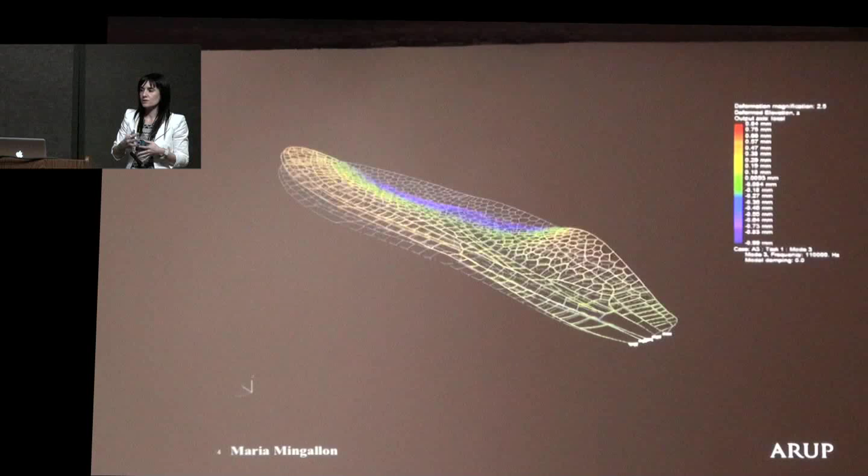So again, geometry, form and geometry in that sense and the structure are not separated, and they're all forming part of the same thing together with function. Now, the use of parametric design tools is actually essential to analyze something like this. It's mainly because parametric design, like nature, is not looking at the parameters themselves individually, it's looking at the integration of those parameters and how they interact with each other. That converts the model into a dynamic entity, so that it's possible to integrate different design decisions throughout the design process.

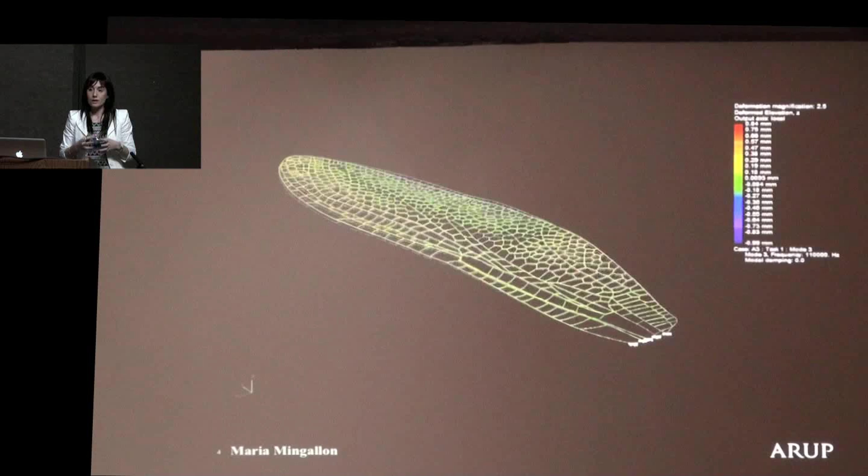Now, all of this sounds very good, but how do we actually deliver total architecture in real projects? Well, tonight I'm going to talk to you about 4 projects in total, where advanced computation has been key.

And the first one is the Metropol Parasol. This is an ARUP project by architect Jürgen Mayer-Hermann. It's located in Sevilla, in Spain, and the ARUP engineer was Jan-Peter Koppitz.

As you can see here, it's a very complex structure made out of wood. But it was essential that parametric design and digital fabrication were used to deliver this project. It would not have been possible at all to deliver something like this within the budget and time frame allowed. Just so you get an idea, it actually took less than a year to erect this on site.

Now, this is the actual bit that made that possible—this is the parametric model behind the scenes. The boxes in black are the inputs, the ones in blue are the calculations, and the ones in orange are the iterations.

What happens here is that we start with a certain plate thickness, as low as possible, and a number of bars for the joint type. The more bars, obviously, the more capacity you have in the joints. But you want to start with the lowest you can, and work your way through a loop: you enter the loop, do your check for structural capacity, considering both the plate thickness and the joint type—the number of bars. Then if it's not okay, you upgrade either the thickness or the joint type. There has to be a conversation between those two parameters for which one you upgrade first and which one you do later.

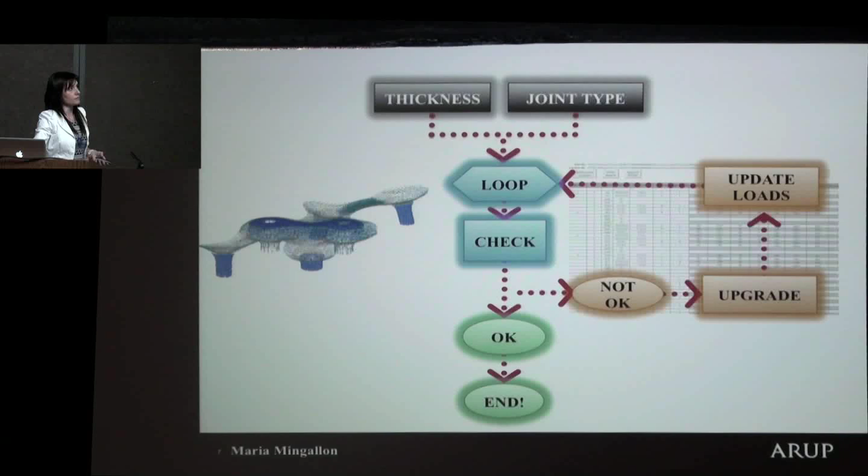The other thing I forgot to mention, which is good about this system, is that you can actually change the catalog of thicknesses and joint types at any time in the process, which is a great advantage to have.

This is the structural analysis done in GSA. At ARUP, we actually have our own software that we developed internally. So for some things we do depend on big corporations, but especially for structural analysis, we don't—we code it ourselves. We also sell it, and this means we can personalize and customize our tools. We ask for the developments we want in this software, and we get it done.

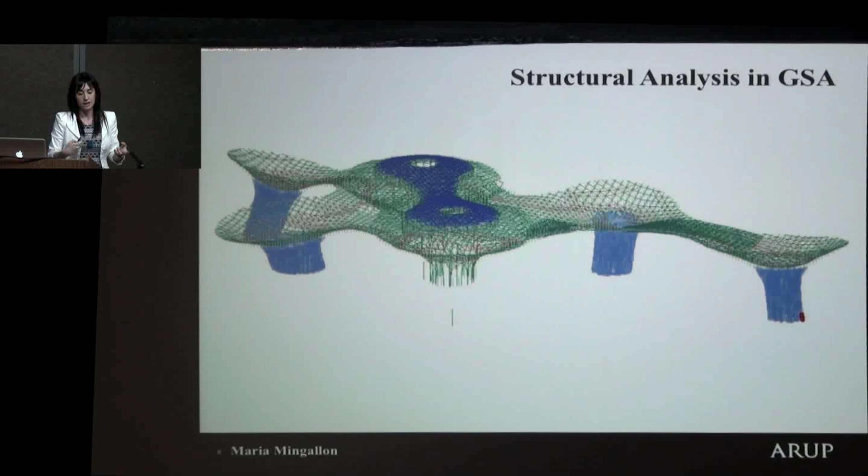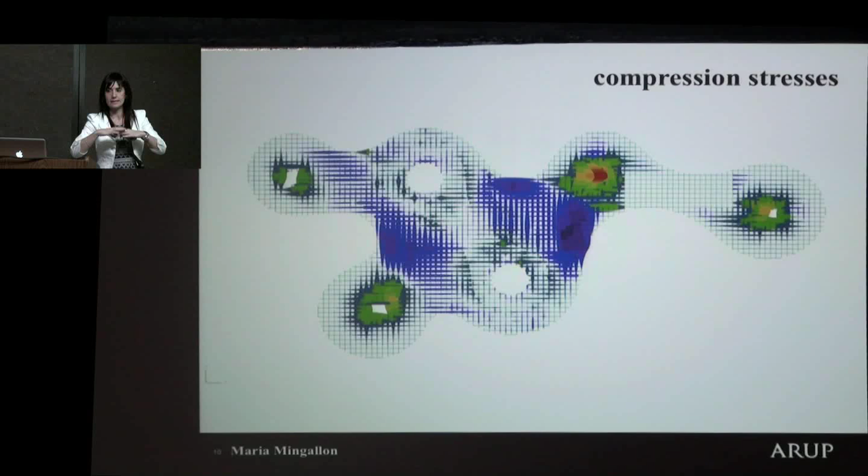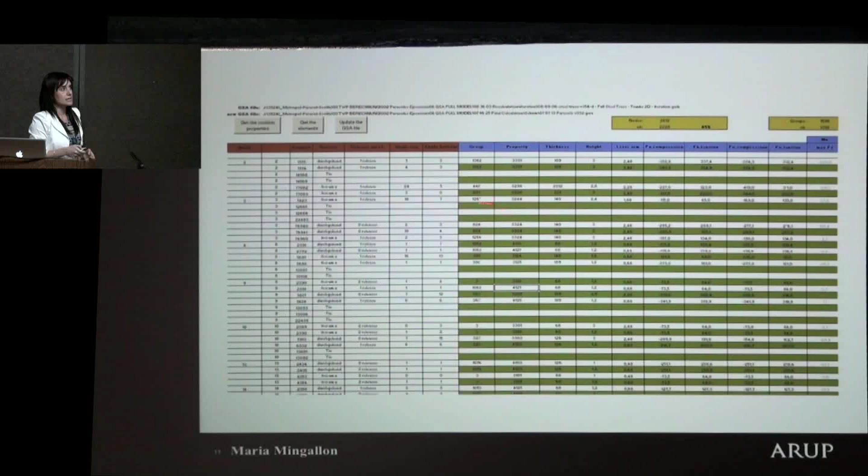Now, after all the different iterations, this is the result. There are no drawings that are easy for construction. All the fabricator wants to actually build this thing is this—as crude as it can sound, it's just a spreadsheet from which they are going to fabricate all these different sections and different joints.

And only with that data, this KUKA robot can actually start. This is a 5-axis robot which was running for 360 days to cut the pieces for Metropol Parasol.

And the plates arrive on site together with the steel joints, all these little boxes. Erection starts on site. You can see the dimension and the scale of the parasol. That's a person right there, and this is one of the start of the columns.

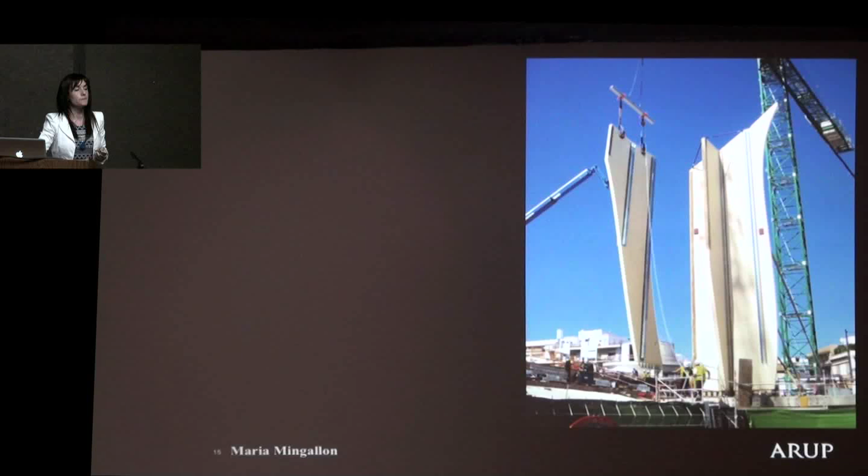They built this temporary scaffolding or platform on top because it was just easier to get your workers up once in the day and start putting all the pieces together, as opposed to having to go up and down with cherry pickers or scissor lifts or other construction devices. It's one of the things that really comes into play when you do complex structures: this sequencing, the phasing, and how you're planning all of that.

So even though you're going to be architects, and maybe some of you actually go into the contractor's side, if you end up doing design, you still have to think about how your thing is getting built. You still have to think: is this necessary? Would that be good? Would that be feasible? Would that make it very expensive? All that sort of thinking has to go in there as well.

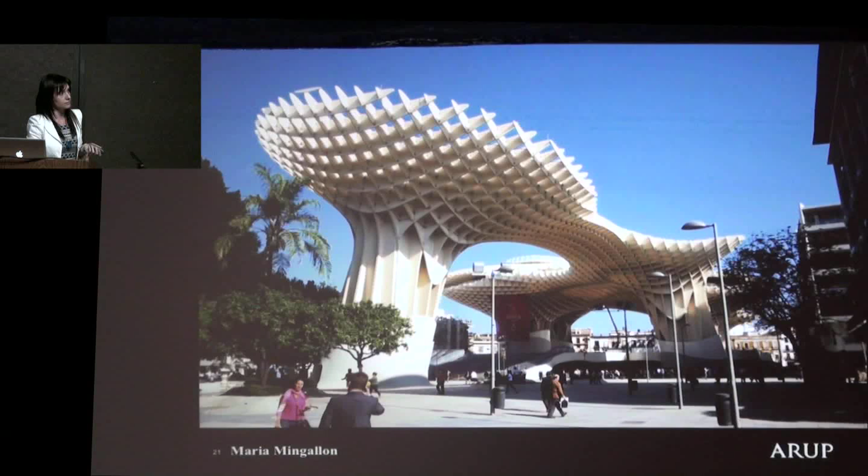And this is it. The Metropol Parasol became real. So there are some images from the top. It actually had a footbridge, mainly so that people could come in here and look at the amazing views of Sevilla.

Thanks to the use of advanced computation, we were capable of adding a lot of value to this project. We did three things mainly: first, minimizing the steel tonnage and wood tonnage used for this project; reducing the number of bars that would have to be used on the joints; and most importantly, talking the language of the fabricator, because all we did was transmit that spreadsheet I've shown, and that fed the entire fabrication process. There were no drawings used for construction or anything along those lines. It was only that spreadsheet I've shown.

And that spreadsheet was actually just the output of all this automated design process. There was nothing else that you actually had to produce.

The Wawona sculpture is a piece by artist John Grade, based in Seattle, who came to us with a commission he had won to make a sculpture out of the Wawona ship. Now, what happened is that the ship was in a very bad state, deteriorated, and they couldn't really keep it as such.

So they decided that with the material that made the ship, with all those timber pieces, they could actually make something out of it and exhibit it, making people aware of how historically important the ship actually was.

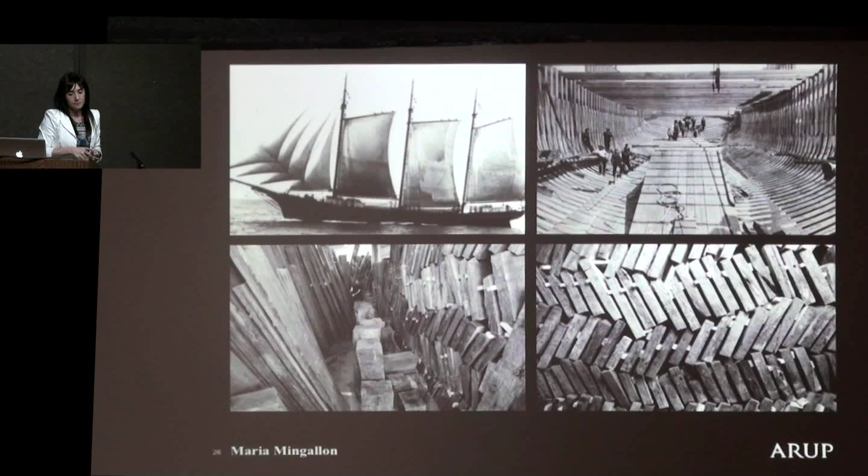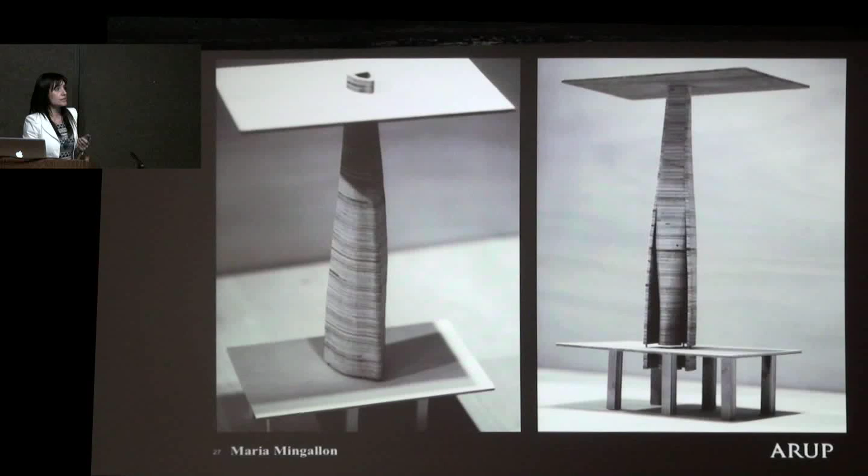Now, if you have realized, I have just said that we are going to make this out of 2D planar elements. So in essence, he was asking us to do this out of this. And so we started to figure out how we were going to actually deliver that.

So what we did was actually divide the structure into different pieces and figure out that we needed a steel frame that could accommodate the different tapering that had to happen in the structure.

What happened as well is that these panels here, we CNC'd them, but we had to think about how much we would actually CNC or mill them by, so that they could accommodate the tapering both horizontally and vertically. So the dimension of these panels, both vertically and horizontally, was set by how much we could actually mill these panels by. And then they were set on the steel frame, which was also taking care of the tapering so that they look as flush as possible.

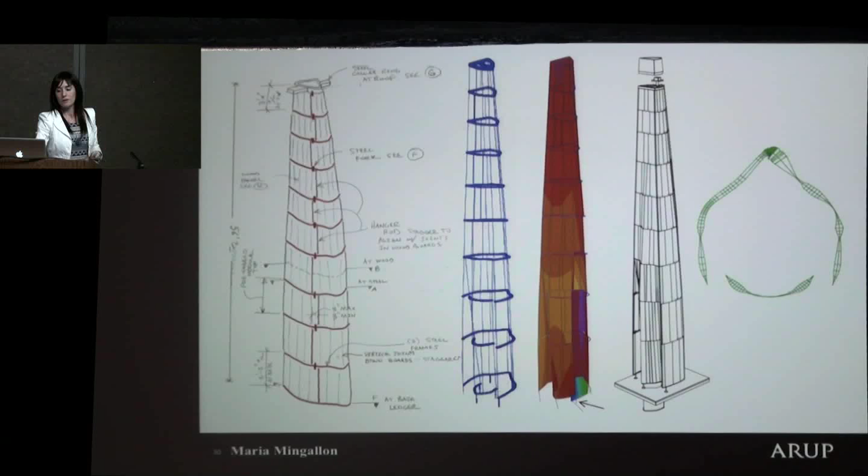And they actually ended up looking very flush. So that's a snapshot of the Rhino model that was used to design this structure, and that's the steel element that I was just talking about.

So this was repeated along the length of the sculpture, and it was taking care of the slight taper happening from one module to the next. Basically you're trying to make something out of pieces that are completely outside your geometry, but doing that by creating a little puzzle.

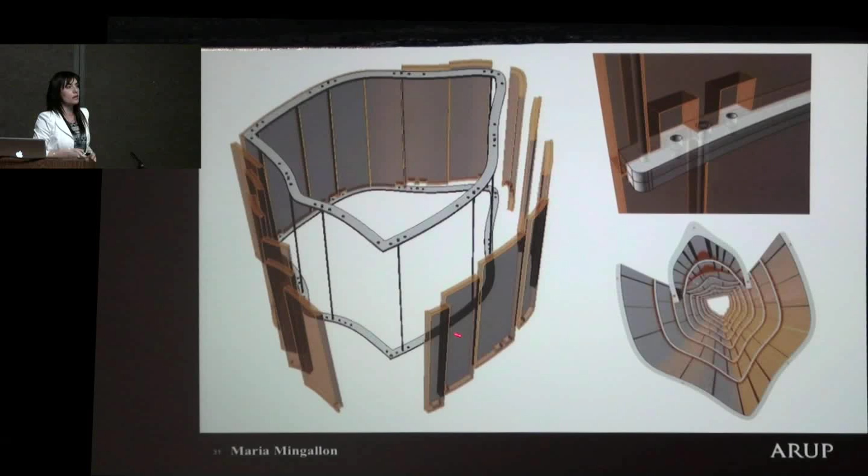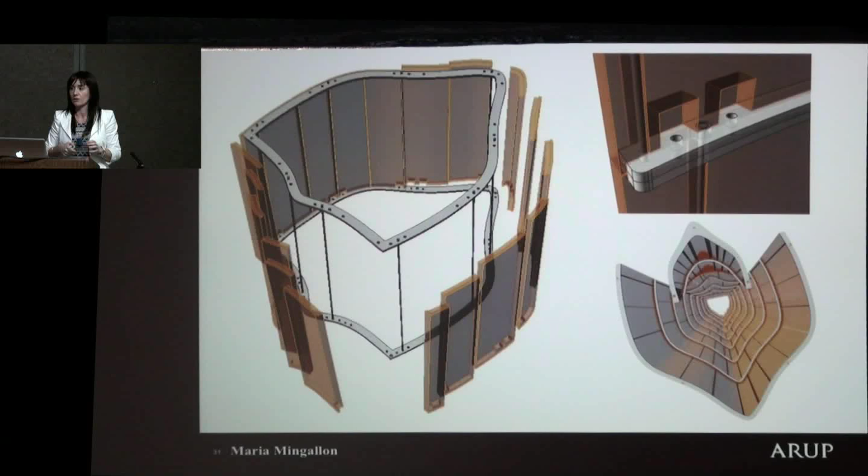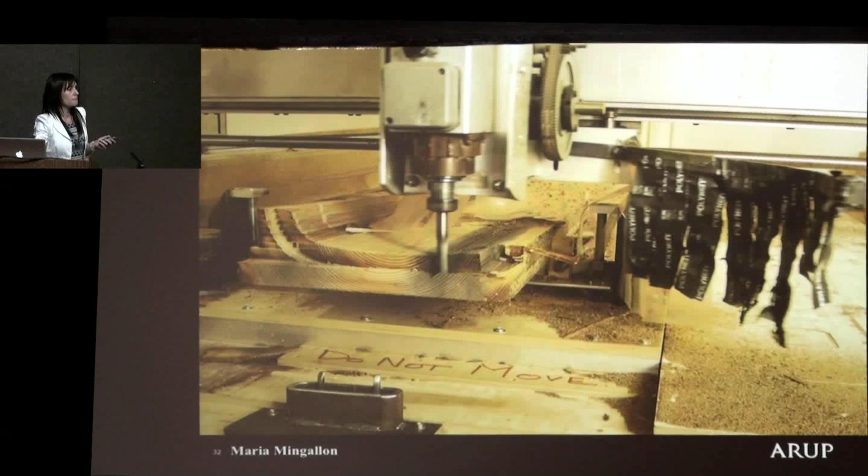Now all of this was modeled in Grasshopper parametrically, and the actual CNC G-code was obtained directly from the Grasshopper model. So these are some pictures of the CNC milling while it was taking place, and this is the piece finished.

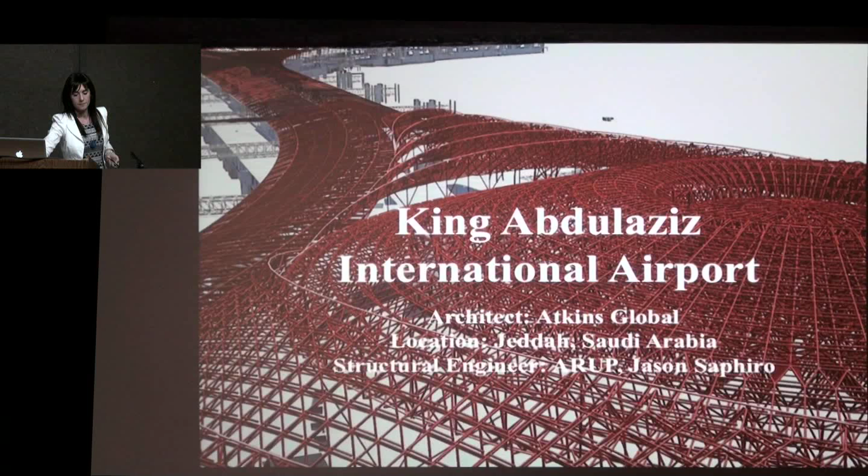So the airport roof is actually made out of, we can say, 3 arms, and they have a central roof which is called the lens. And when you take a section through one of those arms, this is what you get - what we call the gills and the lens.

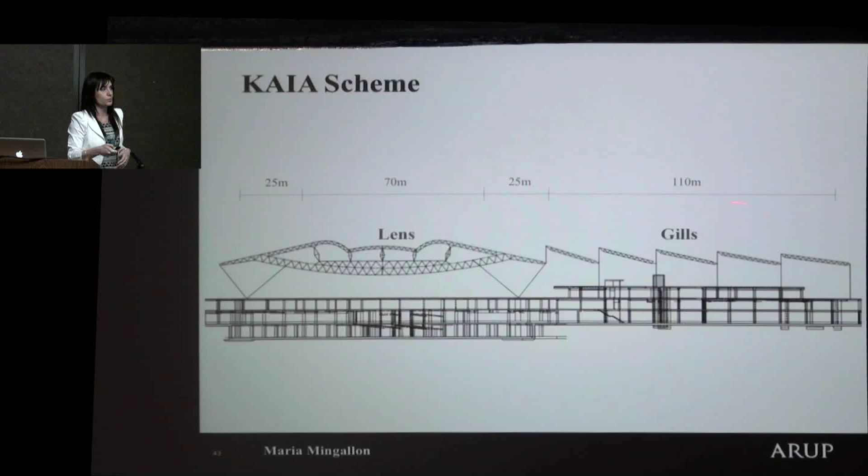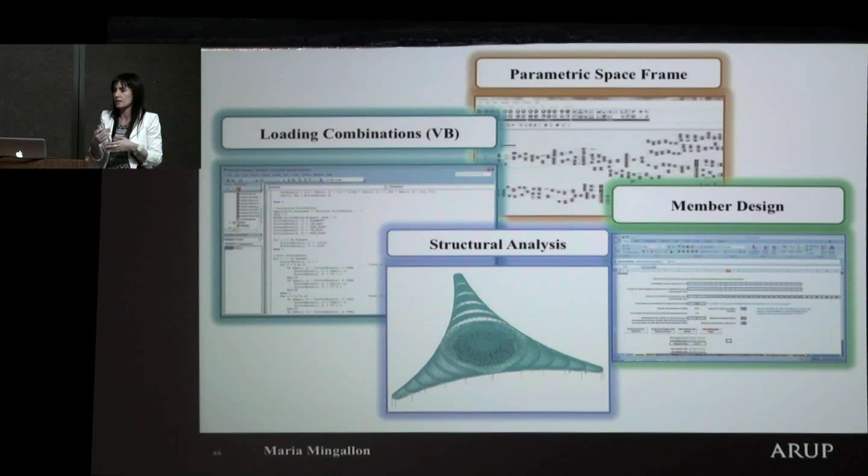Now, the real value of this project is actually in the integration of the parametric design for the space frame, the update or automation of the loading combination - which gets updated every time you change something in the parametric design of the frame, doing that in Visual Basic - the structural design in GSA, and then the sizing of the members. All of these are truly integrated into an automated iterative design process.

Now you're all looking skeptical about all of this, because talking about digital and all that sounds very cool, but what are the results? Well, what we did in this project is we actually achieved a 49% savings on the steel tonnage used when compared to the previous scheme that we were given by the client.

Now this was done by someone else - I'm not going to say the company name here. But you can compare 370 to 142 and all the numbers add up to 49% total saving. Now this is when contractors really understand the point of parametric design, and they don't just see it as building up all these net shapes and that's it. It's not - it's actually to deliver efficiency.

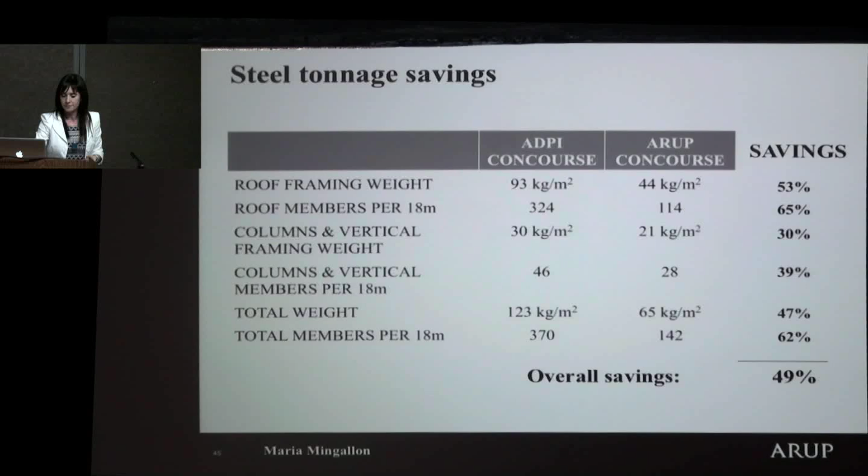So one of the most challenging parts in this project was actually the joints, because you can come up with a very elegant and complex arrangement for all your bars and the truss, but you have to deal with the joints, because all your bars are going to come at different angles. How you do that in an efficient way, without putting at danger the production of the whole scheme because you have all these different angles in your structure, was actually by designing these ball joints in a way that the different angles of the bars coming into these joints could still connect to them.

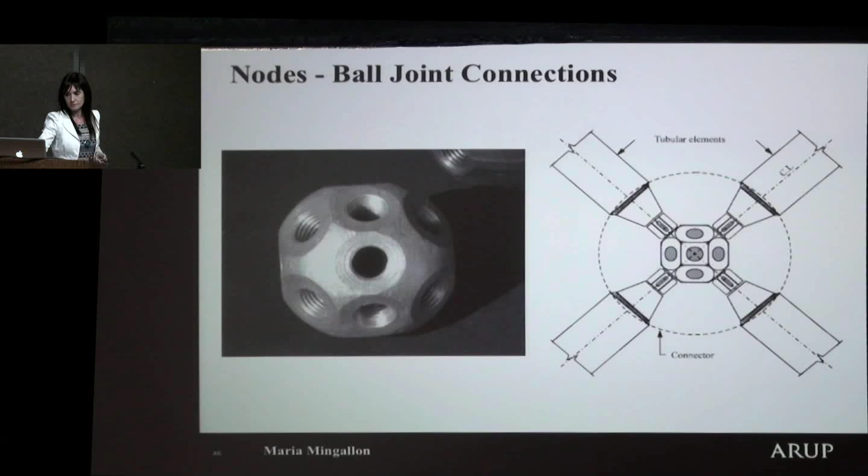Now what we did as well is set up an algorithm that in an iterative manner would actually decide on the size of the joints of these ball joints, and we did that first by checking the interior clashes, but also taking care of the exterior clashes of the bars.

We did this because we were trying to minimize the material used in the joints, but at the same time you have to standardize fabrication. So the more standard joints we would have, the cheapest the fabrication would be. I mean, we all know that.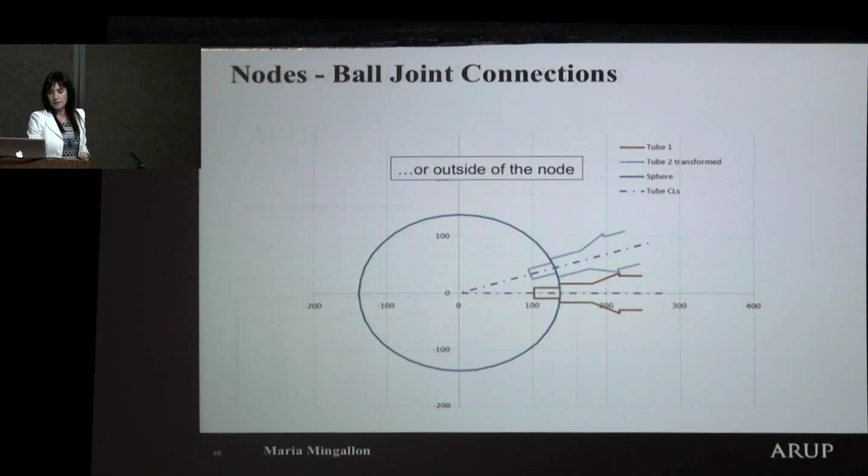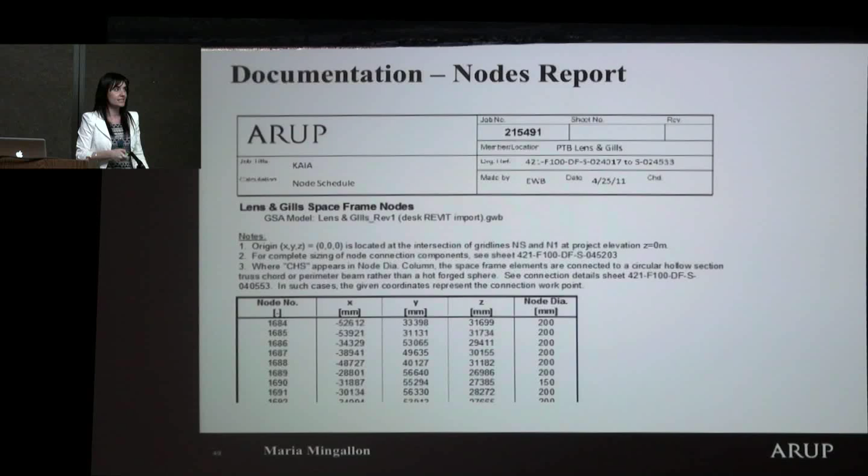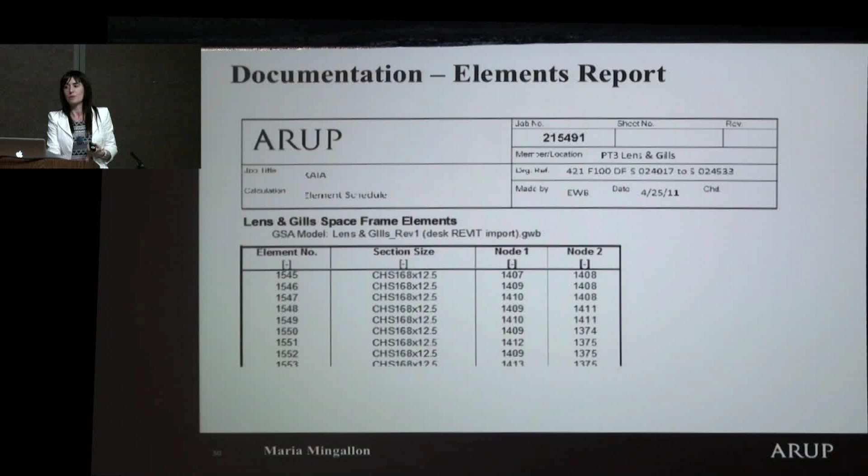Again, in this case, all the fabricator and the contractor wanted was a database of nodes and elements. These were supplemented by a Revit model, but the drawings were still issued in this case. I can't say there were no drawings, unfortunately. There were drawings, but they were prepared and issued as a mere formality, because in some places authorities are not really prepared to just not have their set of drawings.

Now this is the last project that I'm going to show you tonight. This is actually a collaboration with FARMM, the Facility for Architectural Research in Media and Mediation in Montreal at McGill University. FARMM is founded by Professor Michael Jemtrud. As per the introduction, I do projects outside ARUP which are collaborations with universities, and in this case, McGill.

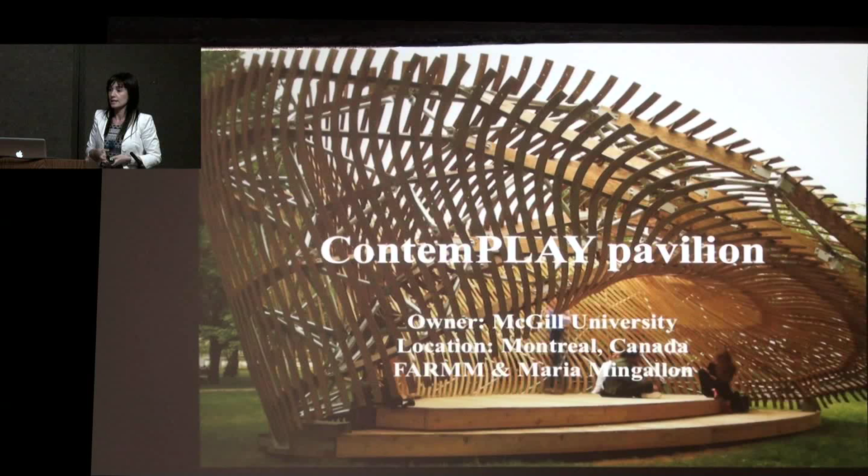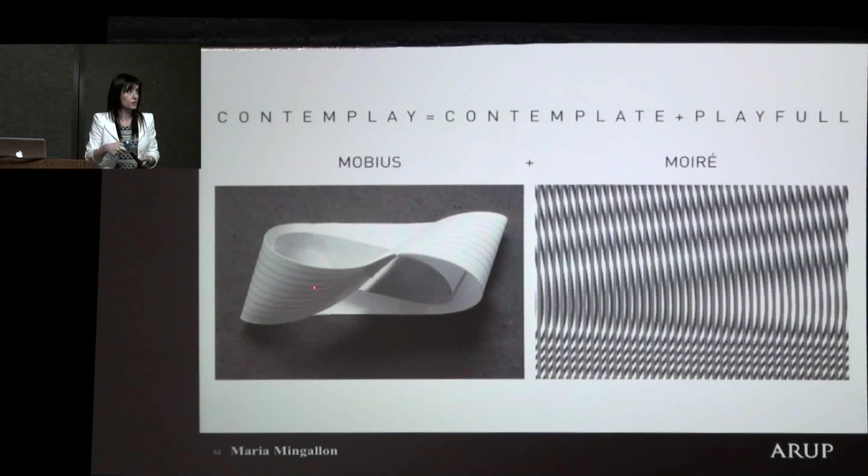So the ContemPLAY pavilion was actually designed with the idea of creating or playing with the perception that you would have from applying a moire effect onto a continuous strip, into a continuous surface, such as the Mobius strip.

So the pavilion was designed as an irregular truss, which was actually set in between the two layers of the moire effect. Now, when I say irregular, I really mean it, because it's really not standard angles or anything like that. And we were able to do this because all our angles or our joints were actually CNC bent.

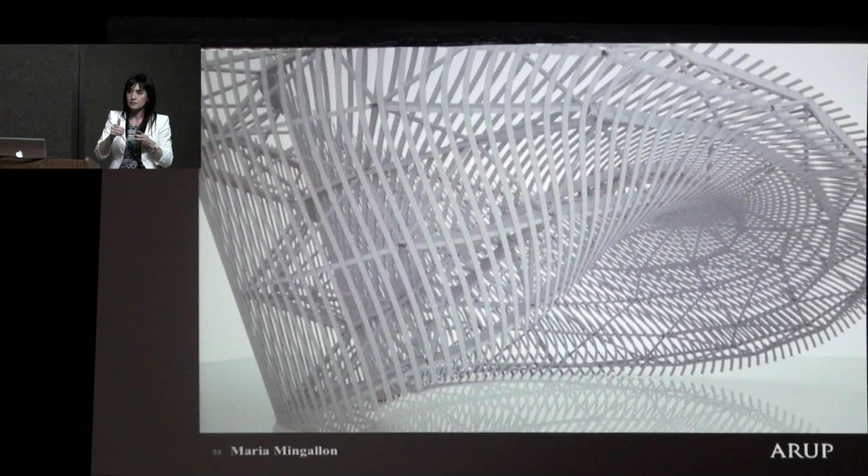So we actually had all of the bolts, all of the bars, all of the moire elements. Everything was designed, was actually done in Grasshopper, so it was modeled well ahead in Grasshopper. And what you see here is a snapshot of the Rhino. This really was very helpful to identify possible clashes and to actually resolve them well early in the process.

But it also helped when we had to actually make changes to the geometry, because we were feeding in the actual instructions from the structural model, or because we wanted to change something because of the architectural program itself.

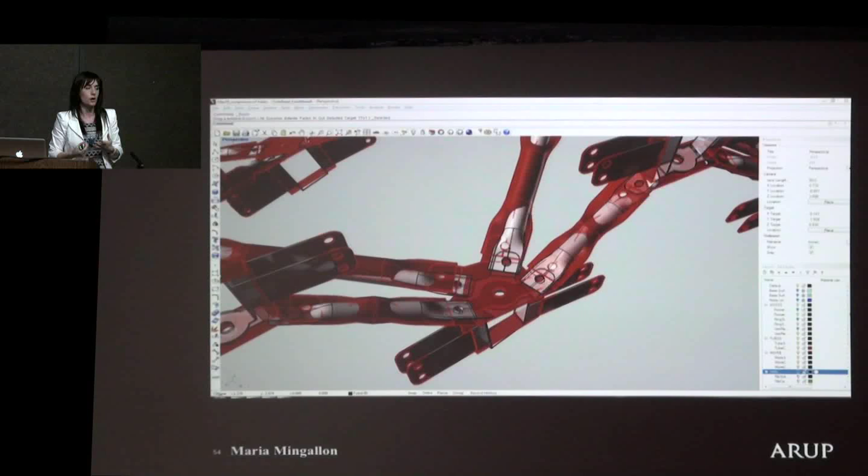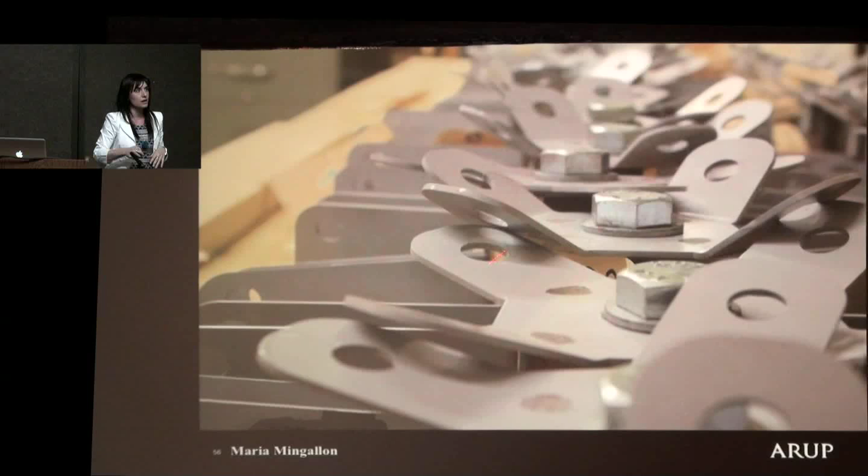I mean, the whole pavilion was actually assembled by students. There were no professional contractors or anything like that. And these are the steel joints that I was just talking about. Now all these angles are different completely, but we were lucky enough that we had this because we could CNC bend all these angles.

Now again, there were no drawings for the construction of this project. What we did was build up a naming convention for the way things were going to be put together, so you would know which piece goes with which without having a drawing next to you. In that sense, it's a little bit like a Lego type approach. And yeah, as I said, there were no drawings, it's the 3D model, and that was it.

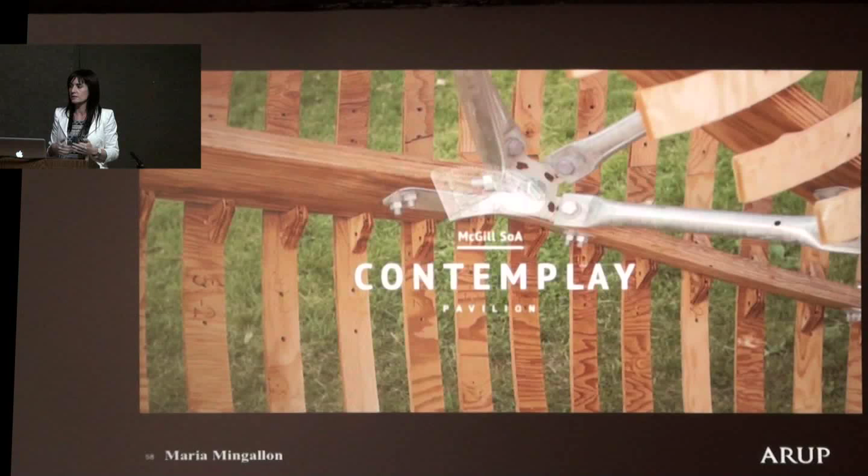Now I'm going to show you a video which I hope you like. This is going to wrap up the session, so I'm going to finish with this video. It's going to show the construction sequence of the pavilion. So I'm just going to set it there.

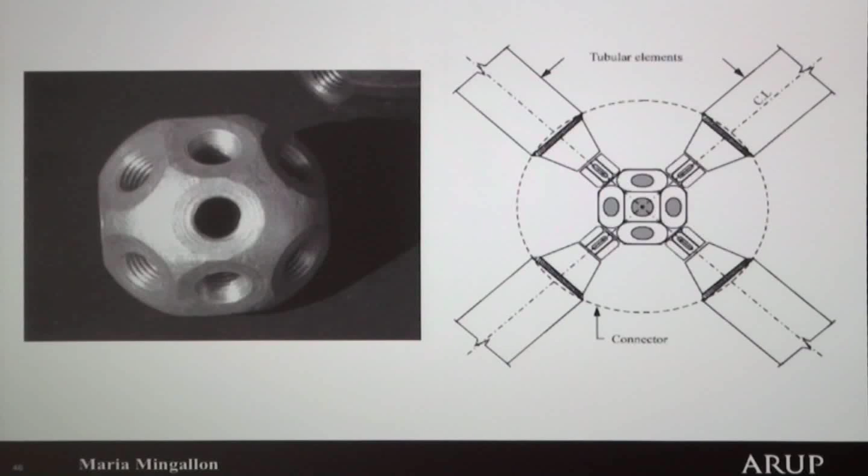I can show, we'll have to go back on this a little bit. So this is just one of the joints that was used, okay? There were more, but what you can see here is that even this joint is going to be able to take bars in different spots, with different angles coming to the joint, and therefore you can actually, in a way, mass fabricate customized structure or customized architecture.